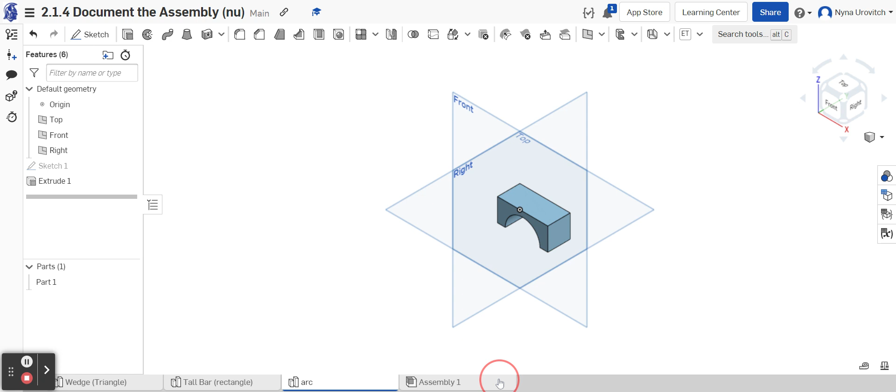We are going to create our BOM, which means bill of materials. We're going to go over here to the assembly. We're going to assemble everything by inserting parts 1, 2, and 3. I'm going to check, and now I'm going to separate them in order to move them around. So I have my 3 parts.

The first thing we always do when creating any assembly is right click and fix it in place. The next thing we're going to do is add a fasten.

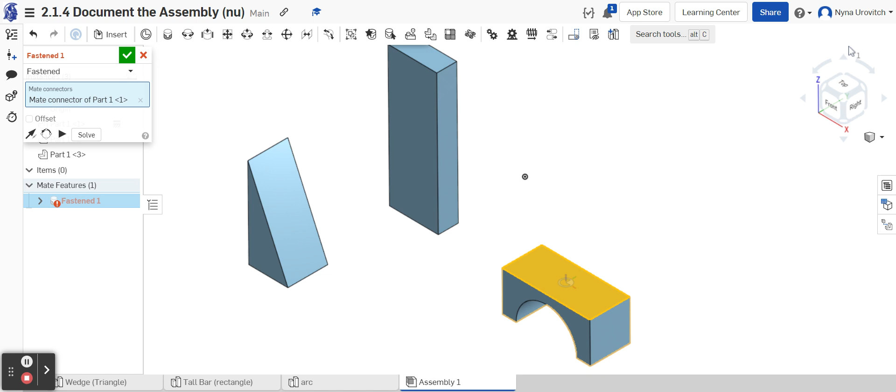Mate over here, and the underside, that's the top of the arc is over there, and over here. Let's do an isometric view. You can see it does not look like the picture because we need to create an offset to line this side up right over here. So let me go X here.

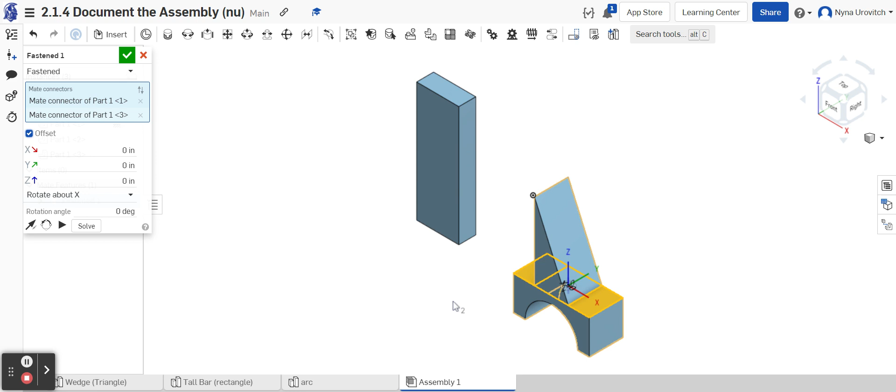I'm going to double click on the fasten mate again. I'm now going to select an offset, and our offset is 0.625. And that lines it up the wrong way. So now we're going to go negative 0.625. If I looked at the direction of the X, I might have been able to do it. There it is, point perfectly lined up, 0.625.

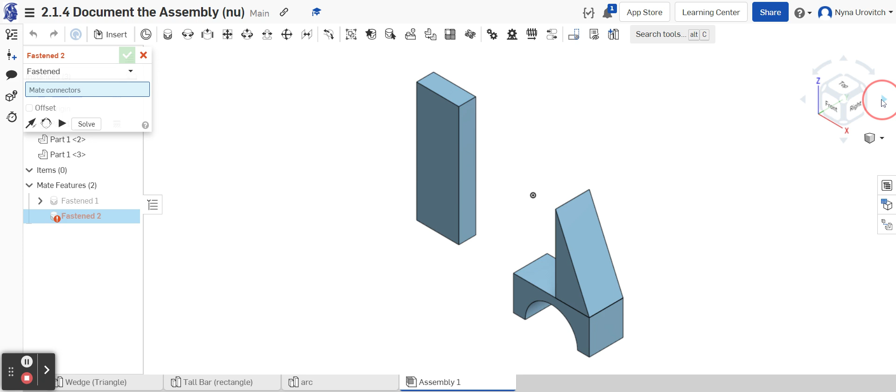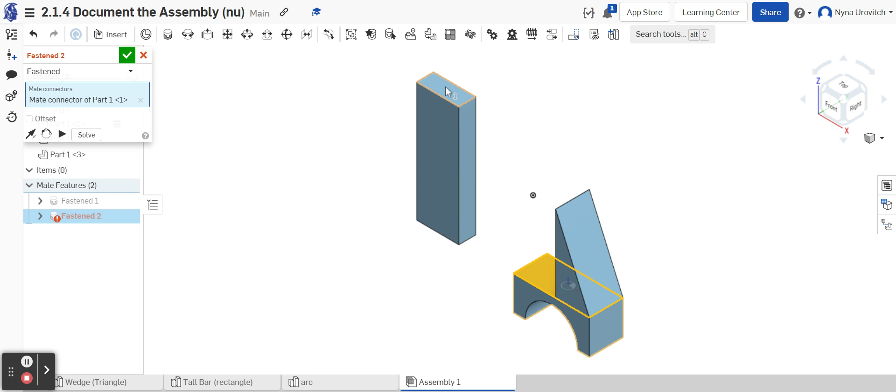We're going to do the same thing with the arc. We're going to take the fasten over here. Let me just turn it around a bit. Okay, there's the center over here, and I'm going to get the center over here. Let me look at it isometrically. There it is. And I'm going to change the direction.

And I also have to use the offset. I'm going to check. I'm now going to use the offset key over here. I think it's going to be offset. I'd like to do it right to the edge, which is 0.5. I'm going to check.

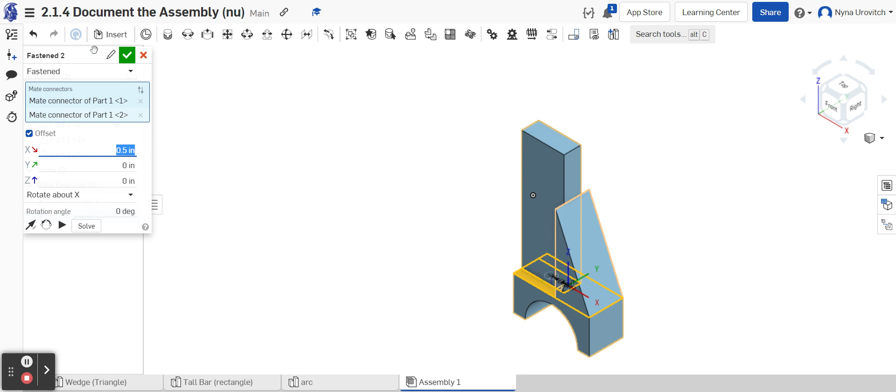And I want to look at the front view, which looks good. And I'll look at the left view, and that looks good. The thing is, we want to see it move 0.15 to the right or to the left because it's a little bit on the edge.

So we're going to now go back to our offset, and let me look at isometrically. And we want to move it along the y-axis. Do you see the green one? So we're going to go to the y, and we're going to move it 0.15. So it's a little bit along the edge.

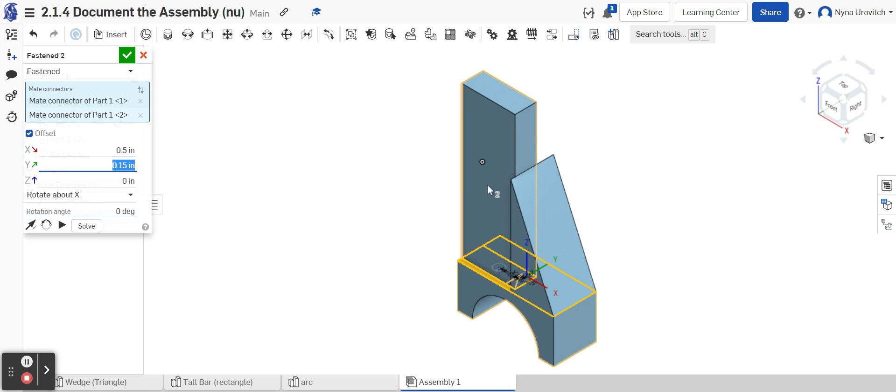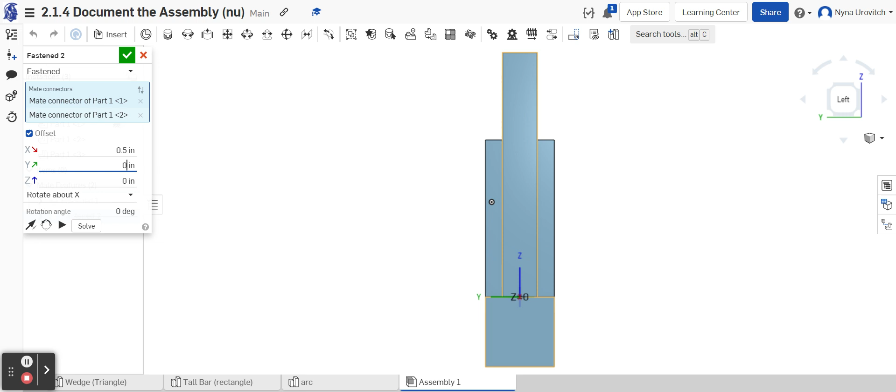Okay, I'm going to check and take a look again. Let's go to the front view. I'm going to go to the left view over here, and I want to see if my Y took. It did not, so let's try it again. 0.15. I'm going to check, and it looks good. So by using the offsets, we're able to shift things along when they're not in the right position.

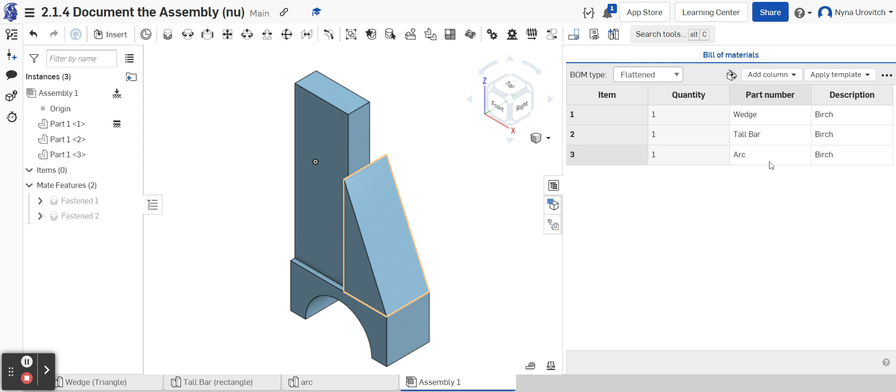The next step is we're going to create our bill of materials. This is the bill of materials, and I already wrote the names in, but you want to double click on the squares. You have the wedge, the tall bar, and the arc. For the description, all I did was write the materials, and it is done.

Now we're going to move to the exploded view. This is the exploded view. It's right on the bottom, it says exploded view, and you see that quite a bit with exploded views when you're looking at parts. Basically, we want to add an exploded view.

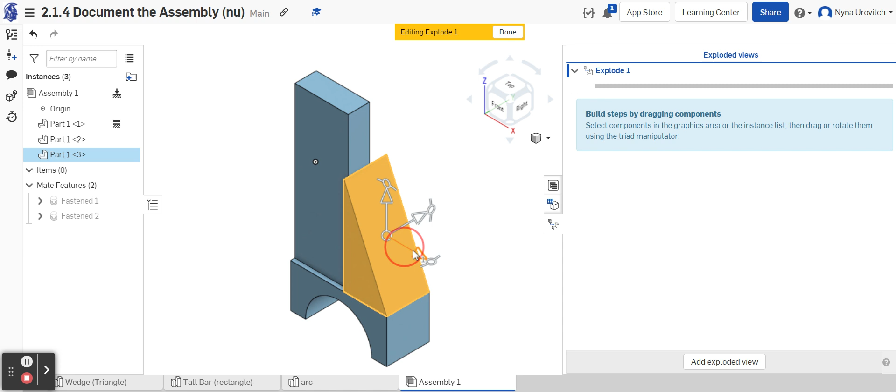And now we want to select the components and move the triad. So I'm going to double click on it. I get my triad and I'm going to move it out. I'm selecting one of the arrows and moving it out, and there it is. Now I feel it's in the way of my arc, so I'm also going to move it up.

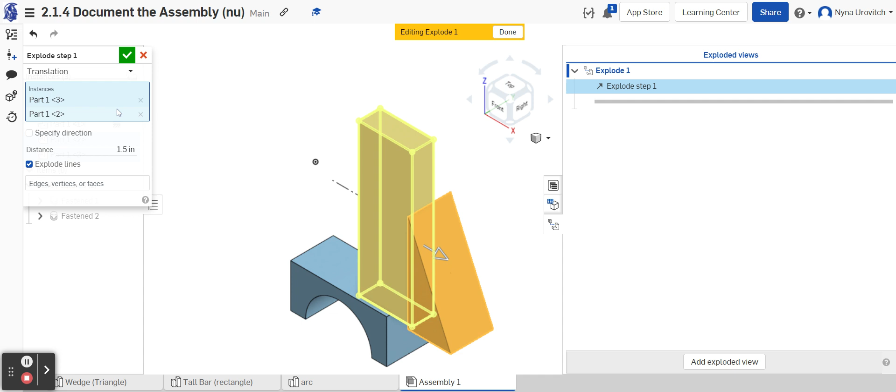I have too many things selected, it tells me the parts. Okay, there it is. Now I'm going to make it a little smaller so it's easier to work with. I'm going to take the square, or the bar, and double click on that. I'm going to accept that, and now I'm going to do a second step.

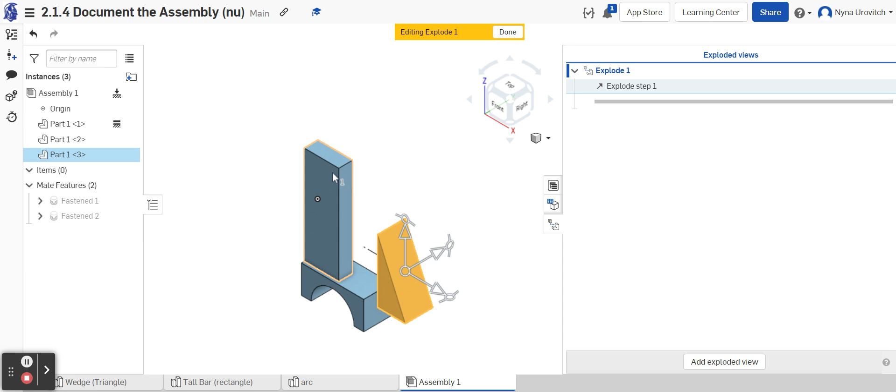Okay, I wanted this also up. Great. I'm going to check. Now I'm going to take the rectangle and move it to the right. It looks good. I'm going to do a distance of 2.5.

I think it's negative 2.5, to show you could do it any way you want to adjust it. And I don't think I have to do anything with the first piece. And my exploded view is done.

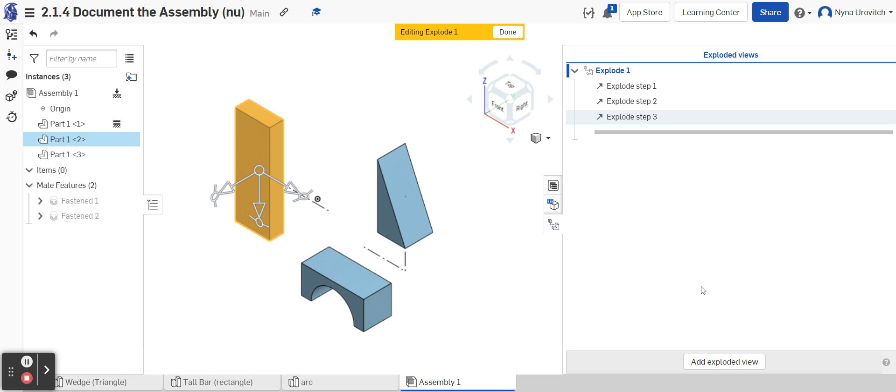It goes away once I hit done. But when you go back in and go to exploded view over here, it's been saved. Now you could, for step 1,

you could rename it and say triangle right. For step 2, you could rename it. You could go triangle up. Actually, wedge, sorry about that.

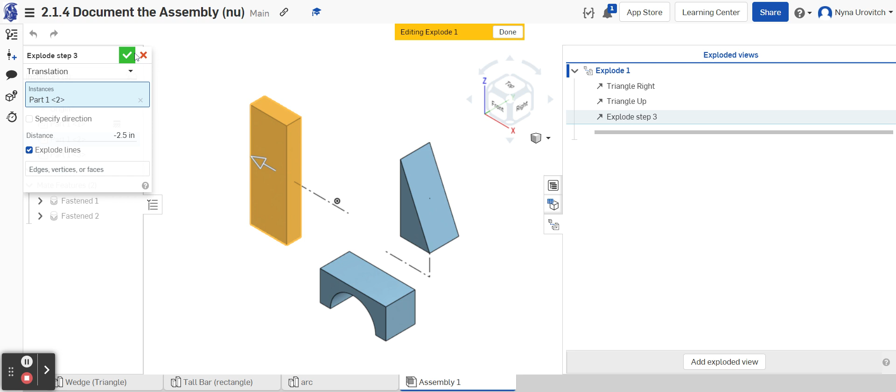And for step 3, you could right click. Whoops, I went into it. You want to right click this, rename it, and I'm going to call it bar left. This way, when you move it around, it could adjust itself, but you know what you're moving. Okay? And that is our exploded view.

You could also change the name here, rename it, basic exploded.